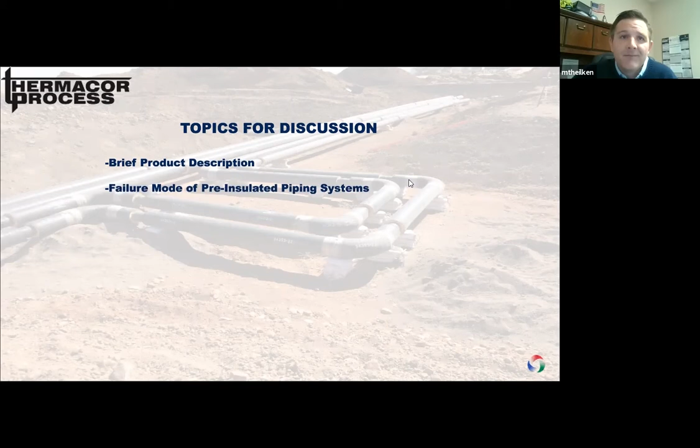So today we put together a few items that can be included in your projects, hopefully to eliminate the problems we see encountered most often. What we'll do is provide a brief product description, specifically our two main staples for both high temperature and low temperature distribution. We'll touch on the primary failure mode of pre-insulated piping systems we see most often, and then we'll address a few items that can go a long way to solving these issues, including our electrofusion pressure testable joint closures, ERM leak detection, and finally our direct buried pre-insulated valves.

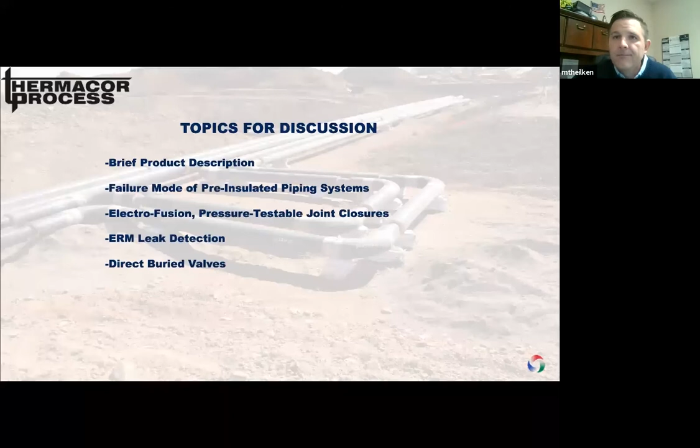For those of you unfamiliar with Thermacor, we're one of the largest manufacturers of pre-insulated piping systems for the district heating and cooling markets in the United States. We've been providing these insulation systems since 1964, continuing to invest in the technology to hopefully make our systems more efficient and more economical.

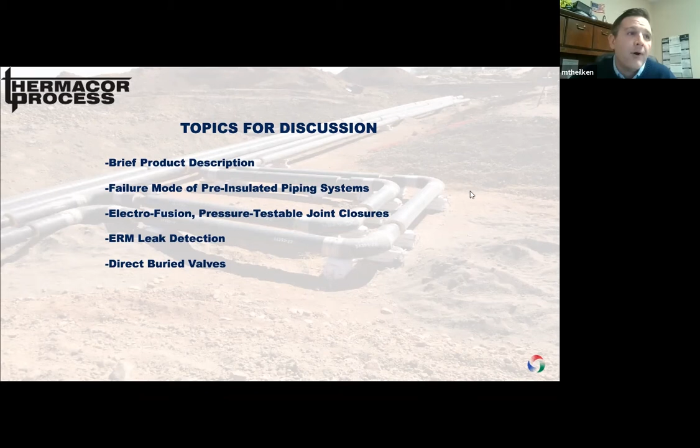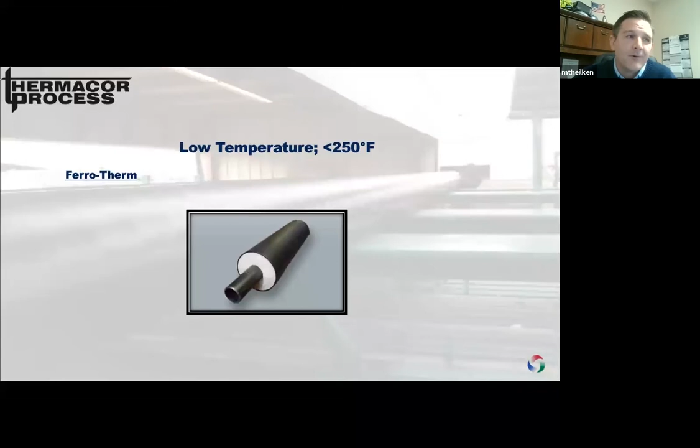The next main product type is our Duo-Therm 505 system, for high temperature distribution over 250 F. That captures all your steam, condensate, and high temperature hot water distribution applications. It's comprised again of a carbon steel carrier pipe, but we use wrapped insulation rated to 1200 F. Most of your systems will commonly use mineral wool or aerogel insulation. This is all within a carbon steel casing that's insulated again with polyurethane foam and a high density polyethylene jacketing, so it's what we call a Class A system - drainable, dryable, and testable. The carrier pipe is centered and supported within that conduit, allowing the pipe to move internally independent of the outer casing and jacketing.

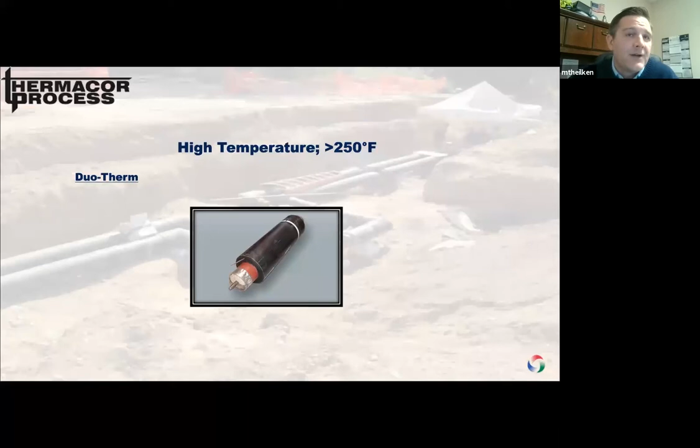Really the common theme between these, both the low temperature and high temperature systems, is the application of polyurethane foam and the HDPE jacketing. We utilize a spray foam, which allows us to apply that HDPE jacketing directly onto the foam after visual inspection, so we can guarantee there's no voids in your system. Both the foam and the jacketing are high dielectric strength materials, which eliminates the need for any additional corrosion coatings or cathodic protection systems at all.

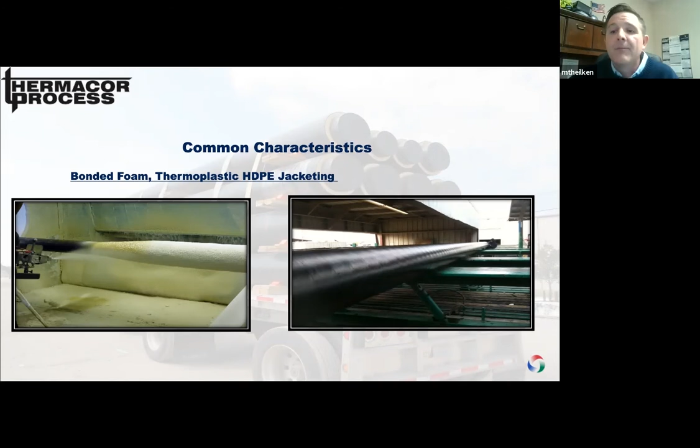Along with 95% of the other pre-insulated piping manufacturers globally, we've standardized on HDPE, high density polyethylene, as our primary jacketing material. The jacket is homogeneous, so any breach in the system is readily visible and easily repaired prior to burial. It has an elongation value of 400 to 800%, meaning the material will flex rather than break under sharp impact loads. Finally, of equal importance, it's a thermoplastic jacketing material that's fusible, and there's no other jacket material in our market that thermally fuses to itself.

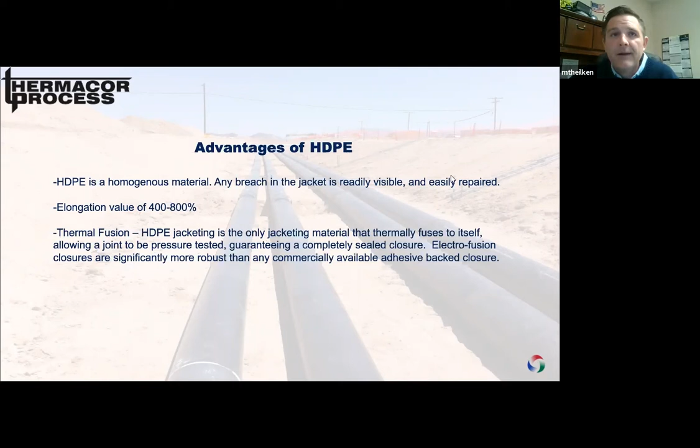And this characteristic allows us to manufacture a field weld repair kit that can be fused and pressure tested.

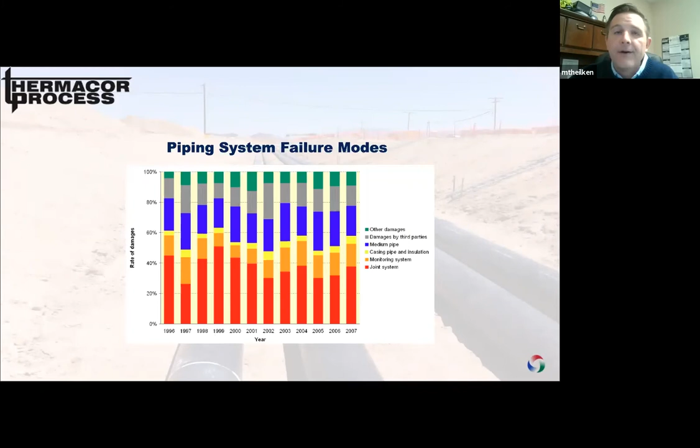Since 1997, Thermacor has been manufacturing our electrofusion pressure testable joint closures. Because we don't have an ASTM standard for pre-insulated piping systems here in the US, we've had our closures tested to the European EN 489 standards. When compared to adhesive backed or other alternative industry standard closures, the electrofusion joint is significantly more robust, and when it's installed and pressure tested, the joint absolutely guarantees the watertight integrity of the jacket.

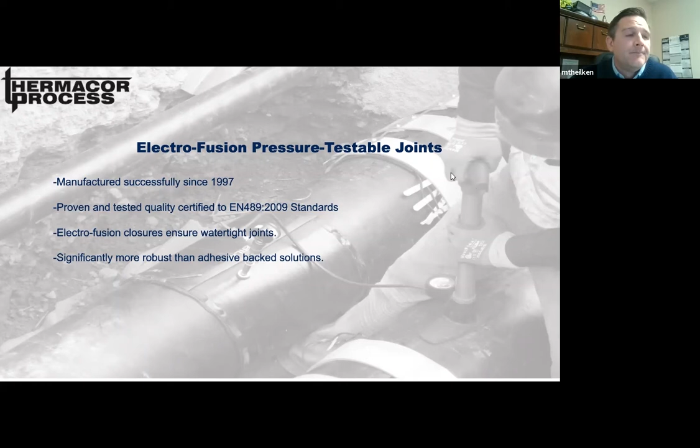As you can see in this picture a little closer, we're actually utilizing an HDPE split sleeve. It's manufactured with the same 4710 resin that we utilize in our jacket, the same material used in HDPE pressure pipe. The concept here is similar to an electrofusion coupling you'd see on an HDPE water line, where we have a stainless steel wire embedded in the 4710 material. The wire is extrusion welded along the circumferential and longitudinal seams of that split sleeve at my shop.

You'll notice in this picture the leads coming out of the closure. We're simply attaching a dedicated power source to these leads, which heats the material and thermally fuses the closure to the surrounding jacket. Once that joint cooks for about 20 minutes and is allowed to cool, we can proceed with testing.

We put a positive pressure test on it to approximately 5 pounds in the joint. And of course, if no air escapes the joint, we can clearly observe that no water can penetrate that joint either. At the end, we'll provide a polyethylene friction weld plug that seals the test hole, and finally, as an additional belt and suspenders, we'll use a heat shrinkable sleeve over the entire configuration.

One thing important to point out: all of the work is being performed at the 12 o'clock position in the trench. One of the biggest drawbacks we see to the shrinkable closures is that in order to properly install them, the contractor actually has to get down under the 6 o'clock position with their bellowed flame to shrink that closure, and we often see that as an area where not enough attention is given.

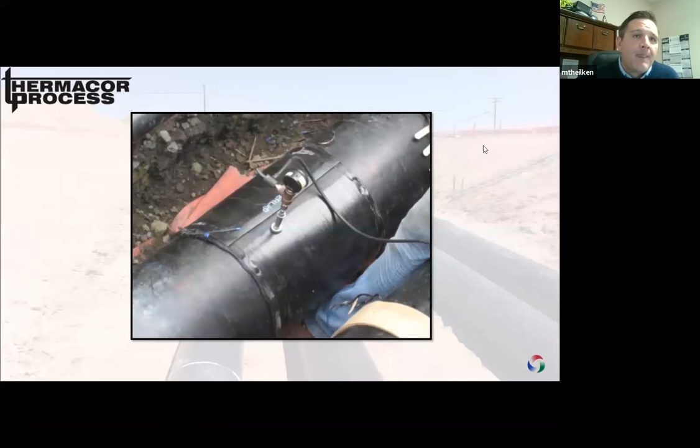In this next picture, we're demonstrating a cross section of the fusion weld. In performing the tensile strength test on this joint, the material actually fails on the jacket as opposed to the weld, as the weld becomes stronger than the material surrounding it. So you can visually see that there's absolutely zero pathway for water ingress into a system sealed with this closure, and really it's the best way to guarantee a proper installation.

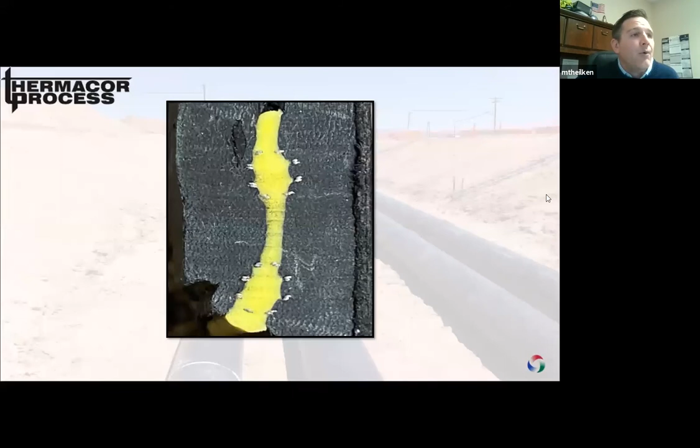We're always going to require a log sheet to be completed with the pressure test information on each joint in order to issue that warranty, so that we can confirm that it's done correctly.

But in the event that a joint is still improperly installed, or if there's damage to the piping system during a subsequent excavation, we can also include our electric resistance monitoring leak detection into the system, in any application that utilizes that exterior polyurethane foam and HDPE jacketing that we looked at before.

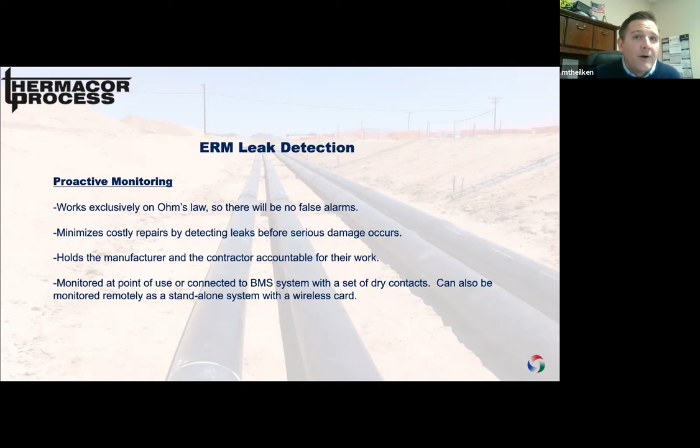The ERM system works exclusively on Ohm's law, so we know there's no false alarms. It minimizes repair costs by detecting leaks before serious damage occurs, and at the end of the day, it holds both the manufacturer and the contractor accountable for the work. Basically, it tells on you if you did something wrong.

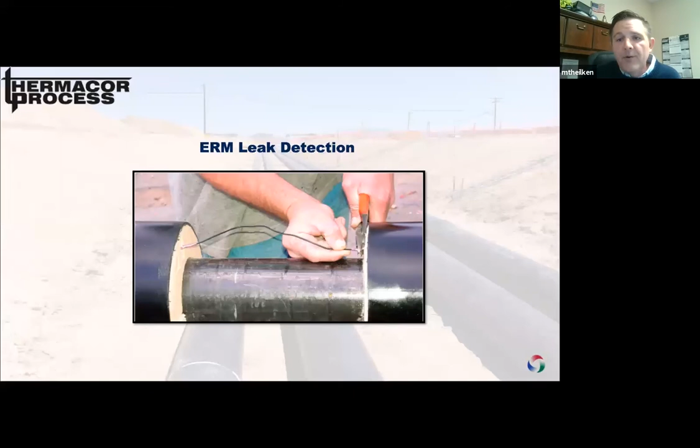The ERM system is simply a bare copper wire, embedded in the foam between the foam and the HDPE jacket. We're simply measuring resistance between the bare copper wire and the carbon steel pipe. If resistance is infinite, we know the system is dry, and of course if resistance is approaching zero, we know we've got moisture in the system and have to take a look at it.

Taking it a step further, we can also use that same leak detection wire to locate the leak. So the system goes into alarm, you know you have an issue, there's a fault in there somewhere. We can utilize a TDR, or time domain reflectometer, which sends a pulse of energy down the wire, and depending on how long it takes for that pulse to get back to the instrument, we can locate a leak or fault to what we call backhoe accuracy. All of our systems also come with a field weld map, so we can further isolate where to dig by looking for that field weld location closest to the TDR readings.

So we can generally tell you exactly what joint you're going to have an issue at. So really, in summary, including the fusion closures on your systems keeps the water out, and including the leak detection on the systems allows you to proactively monitor them.

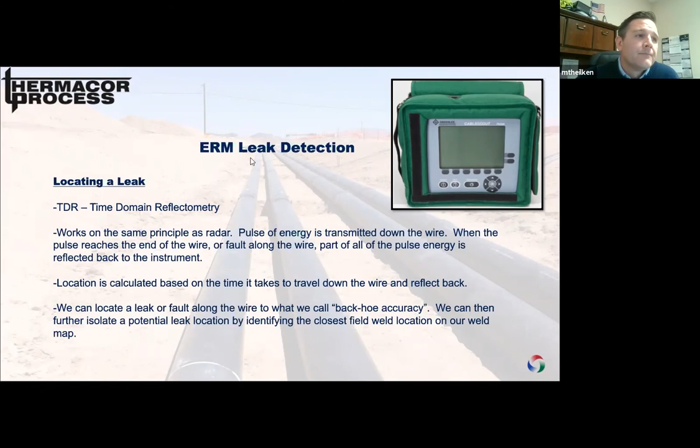And so finally, for discussion today, we'll look at the long stem valves that are designed to be pre-insulated for direct burial. These are for bonded foam systems only, so they're applicable to hot water and chill water distribution systems. Regrettably, they're not yet rated for steam.

But the idea here is that we're eliminating yet one more problem that faces a designer of a district heating and cooling system. That problem is, how do we keep our valve vaults from flooding and increase the longevity of the mechanical equipment inside the vault?

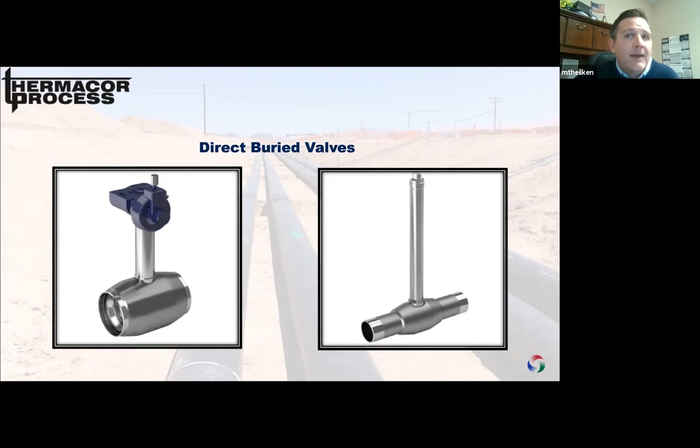So we've come up with a solution, and the answer is to utilize the fully welded and insulated valves to eliminate your vaults altogether. These valves are low profile, so they can be insulated and easily integrated into the system. We'll insulate and jacket these valves all the way up to the stainless steel operating nut, to fully protect all of the components within the valve.

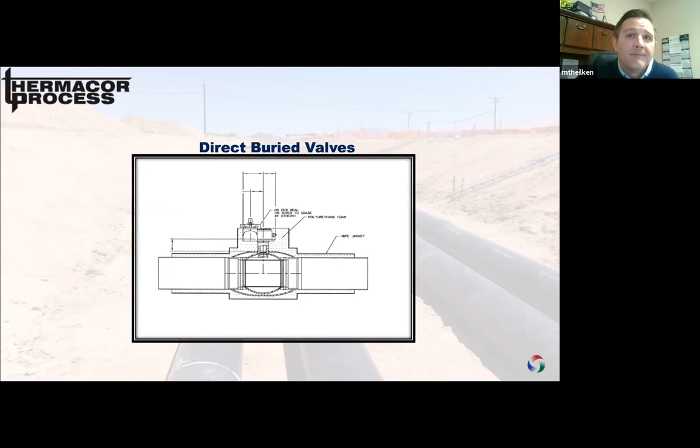Over the past 7 or 8 years, we've developed a relationship with Vexve out of Finland. For those unfamiliar, Vexve is one of the foremost valve manufacturers of district heating and cooling system valves in the European market. All these valves have stainless steel balls or discs, and they're weld end, whether we're providing ball valves or butterfly valves.

So we're not having to worry about flange connections underground. The ball valves are available up to 24-inch, and butterfly valves are used for anything larger than 24-inch. But all of these valves are designed to be operated from grade with a T key.

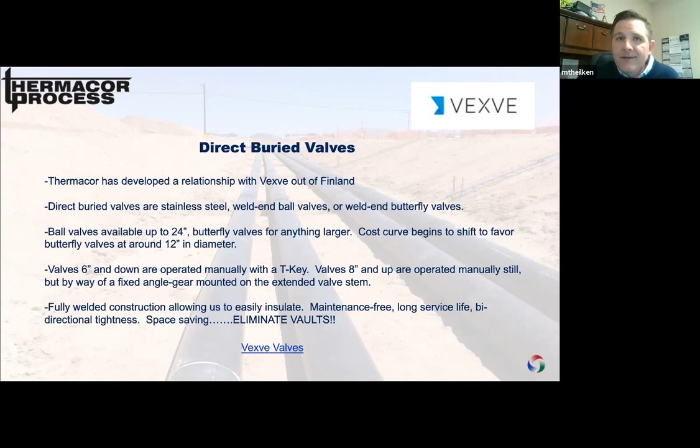So you can see here where the cost of a butterfly valve versus a ball valve really starts to diverge at around the 12-inch or 300 millimeter mark. Most of our customers prefer ball valve when available, but on the larger sizes, it can be more economical to use a butterfly valve.

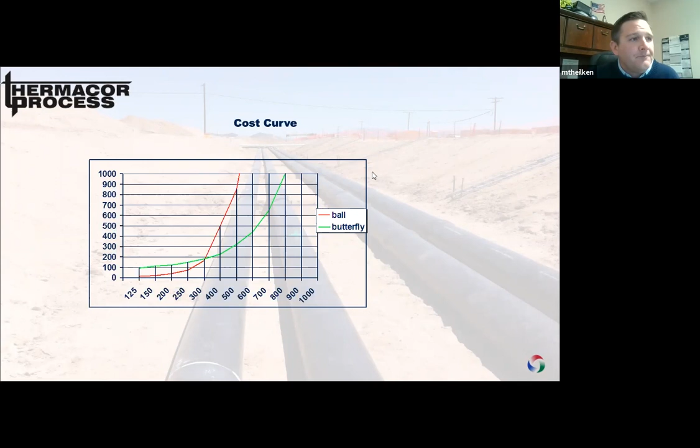These valves are going to be offered in both a reduced port, which is what we see most commonly in the district heating and cooling systems. That does cause some pressure loss, but generally it's acceptable for these systems. Full bore valves are available, but unfortunately they require more material, making them more expensive and lengthening the lead time. So most of our customers go with the reduced port valves.

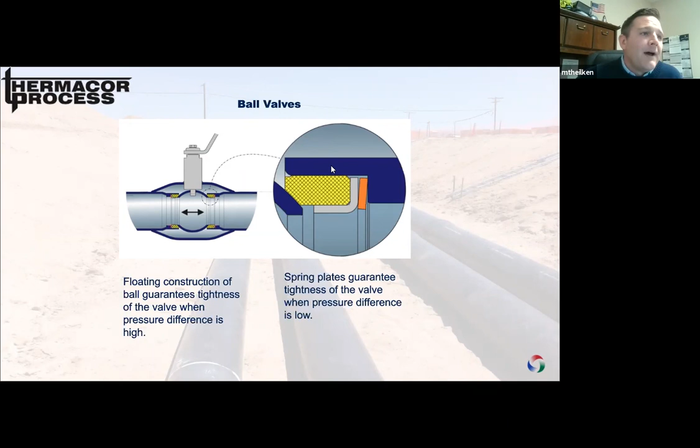Again, the majority of our hydronic systems are under 24-inch, so our customers prefer the ball valves, but we do also offer the butterfly valves. They're designed for heating and cooling, metal seated and maintenance free. Just like the ball valve, they offer total tightness in both flow directions with that metal to metal sealing system. And the body is a rugged, fully welded carbon steel pipe.

So whether it's a ball valve or a butterfly valve, we design the valves into the system at or around anchor locations, which eliminates any bending or shearing forces on the valve shafts. And because we're able to insulate and jacket these in the factory, we can ensure that they're watertight, which eliminates typical maintenance costs as well as added costs of premature replacement.

So in recapping the presentation, the 3 easiest ways to increase longevity of investment are: making sure the system's properly sealed and tested; being proactive so that you know if you have a leak, so you can locate and repair it; and finally, taking advantage of the low-hanging fruit by eliminating vaults where possible, because these are several of the areas that we know to be problematic.

So hopefully we provided some value to you and you found this productive, but whether you're utilizing the components today or want to look at them further, Long Building Technologies and Thermacor are happy to provide any additional information. So please just let us know how we can help.